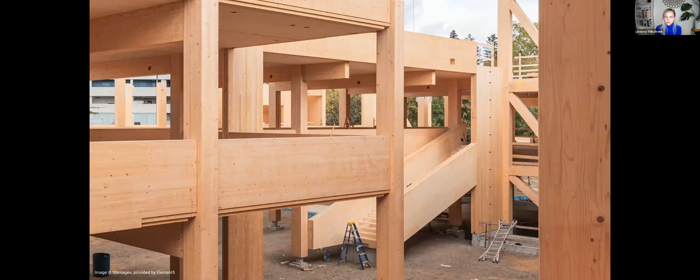Why mass timber as a starting point? Wood construction is ancient, but also evolving more rapidly than ever before. It's more carbon sequestering than any other structural material in existence. Mass timber presents a new way to build renewable, plant-based, urban density that is so essential to low carbon living.

If mass timber is the future, we have some questions. How is the supply chain being built? Who will have access to healthy building materials like this? Who owns the forests that will provide the raw materials? Are there enough trees in the world to build the mass timber cities of the future? Is mass timber safe? Will mass timber improve or reduce deforestation and biodiversity?

Are trees more valuable in the ground or as timber, as carbon sinks or carbon sequestration machines? And will carbon markets anticipate if this value shifts? And finally, how are Indigenous interpretations of forests critical to this transition?

The reason we have so many questions about materials is that we hope there will be a dramatic divergence in the way we view and use resources from the last 500 years. To quote a friend of mine, Jerome Hayford, 'Normal is what got us here.' From the perspective of forests, this is especially profound. The last 500 years of Eurocentric power produced specific imaginaries of nature, value, virtue, and therefore personhood.

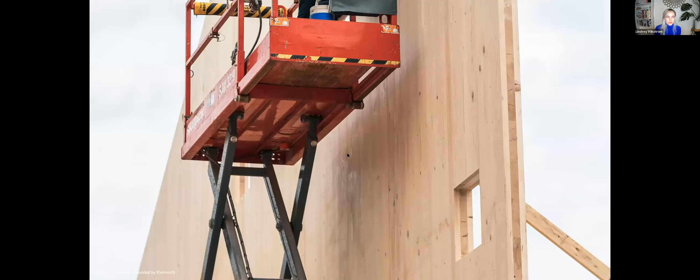Right now, and depending on the region, mass timber is assumed to be about 10% more expensive than typical construction methods, because typical methods are by definition entrenched. And when Black, Indigenous, and communities of color are systematically separated from landscapes and architecture that are healthy and wealth producing, typical methods risk the continuation of exclusivity.

Equity-driven developer Anjali Halova will share with us how her role requires a whole new level of choreography across stakeholders throughout the supply chain. Her dedication to this emerging expertise is what makes accessibility possible.

Mass timber for the last 30 years has been designed to rely on only a few tree species. If future cities are plant-based and certified through the building code using only a few species, does this not incentivize a reduction in biodiversity or, in fact, monocultures?

We are joined today by Dr. Peggy Clouston, who is leading the effort to biodiversify mass timber on the East Coast using trees that are regional. She will share her research on the challenges of certifying organic building components.

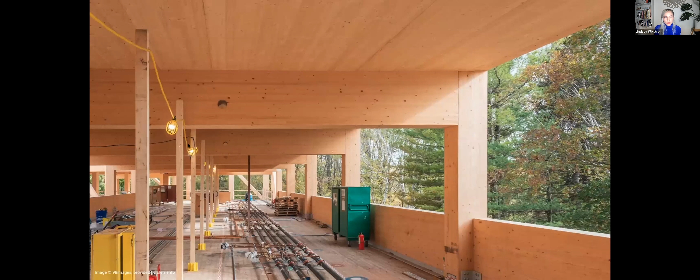Ultimately, planning a forest for the future engages the complexities of public and private ownership and stewardship, as forests span many generations. They require enormous acts of diplomacy and an assessment of bias in new but necessary technology.

Today, we're joined by the President of the Forest Stewardship Council, FSC, Francois Dufresne, who will share more about the rapidly evolving process for ethical sourcing, framing the forest as an essential infrastructure, and how Indigenous interpretations of the forest are being recentered as a means of survival. And with that, I would like to welcome Francois.

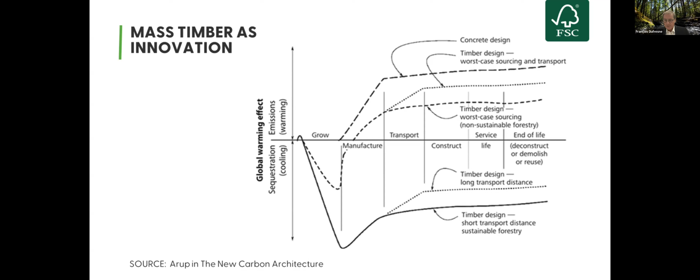Now, let's switch to the human impact. The UN estimates that 68% of the world's population will live in urban centers by 2050, making the pivot toward responsibly sourced mass timber in construction critical. Critical to our fight against climate change and to support the housing needs of a growing global population and the trend of urbanization.

But some may ask, how is wood or mass timber a better option in construction when the degradation of our world's forests is a key contributor to the climate crisis, as Lindsay mentioned at the beginning of this talk? It is true, forests are a natural climate solution. They absorb one-third of the global CO2 emissions every year.

Forests are also home to over 80% of the terrestrial biodiversity, support soil and water quality, and provide us with the air we breathe. But when managed responsibly, forests are also, in my belief, the most amazing renewable resource on our planet.

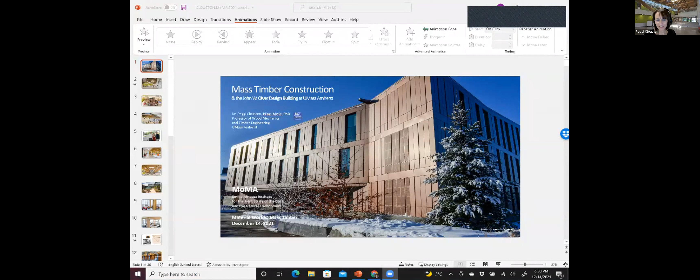Hi, everybody. Just pulling my screen up. Should all be able to see it now.

Well, first, I'd like to thank the Ambasz Institute and Lindsay for inviting me to talk this evening. I'm truly delighted to talk with you about construction with mass timber. I'll do that by way of example with this state-of-the-art mass timber structure, the John Olver Design Building at the University of Massachusetts Amherst. I'm one of the fortunate ones who has an office and lab in this building. I'm very proud to say I was one of the driving forces behind making this timber frame structure.

So I'd like to tell you about how this building came to be and then explain why mass timber was used here. But as Lindsay mentioned, I'd also like to show you some of the groundbreaking research my group is doing on using New England species to make mass timber. So let me start by telling you a bit about the building itself.

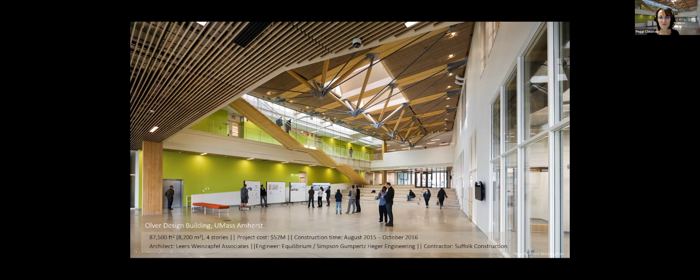It's one of the first buildings of its size in the US to be framed with mass timber. It was completed in late 2016 when there were only about 30 mass timber buildings here. Now there are over 1,000, either built or in the planning stages. This particular building has won 17 architecture and engineering awards, some extremely prestigious, like Building of the Year Award by World Architects. It's really known worldwide—I give tours to people from places like Japan, Australia, and Finland.

My program is building and construction technology. It's housed here together with the departments of architecture and landscape architecture and regional planning. This is my lab here off to the right. Our research and courses all focus on how to build more sustainably, and using wood in the construction of the building was a major part of that.

But it almost wasn't wood. Interesting story. Myself and a colleague, Alex Schreyer—he's over here in the photo, showing students some of the staircase details—we were both strong advocates for mass timber from the start. We tried our best, from a bottom-up approach, to convince the design team to use wood, but it didn't work. There were understandably concerns about cost overruns with timber being a new, unfamiliar technology to the team. It wasn't until I brought in the political heft and willpower of former Congressman John Olver that we were able to secure a $3 million contingency fund for it. It became a demonstration building, and that was really the turning point that made it wood.

Our vision for the building was that as a demonstration structure, it would spur others like it and help us make three points: first, that mass timber is feasible for this size of building; second, that it's more environmentally friendly than steel and concrete; and third—this one's important—that a wood building of this stature could help reinvigorate our own local forest industry. The thought of having a market for local trees, and one day using our own tree species to build such a building, that was the vision.

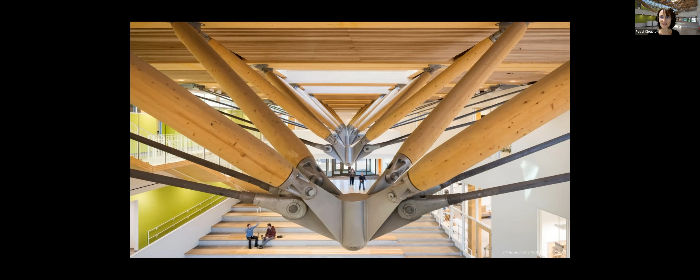These are students getting up close and personal with the main attraction, the zipper truss. This is the student's view into the atrium—we like to call this the Kodak photo spot in the building if you're ever visiting. On top of this beautiful truss is a rooftop garden with indigenous trees and plants. This garden was part of the landscape architecture wish list, to demonstrate intensive and extensive green roofs. Just a fun fact: the garden was actually voted the #1 dating spot on campus.

And here are some students hanging out in the Post and Beam Cafe. Clever name—I wish I could take credit for it, but the students came up with that. As you can see, the columns are exposed, so the structure itself is the finishing material.

And that's one of the great things about mass timber: it can be exposed like this without fire protective coating. In traditional steel and concrete buildings, or even light wood frame construction, the structure is hidden behind gypsum or fireproofing. These big wood beams, panels, and columns easily meet the 2-hour fire rating per the building code, because large sections of wood are inherently fire resistant.

They don't catch fire easily. If you think of a campfire, for example, we start with kindling, small pieces, and the large pieces we put on are the last to catch. When they finally do catch, they burn slowly at a predictable rate. They char on the outside, and that char forms an insulating layer that protects the structural integrity of the inner core of the beam.

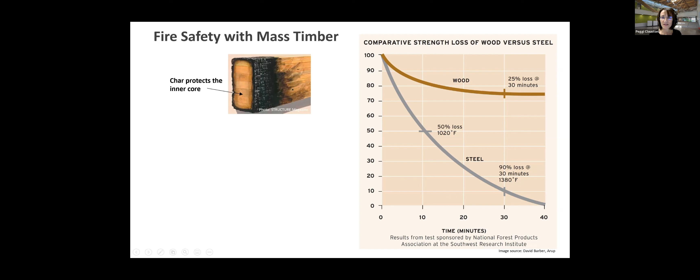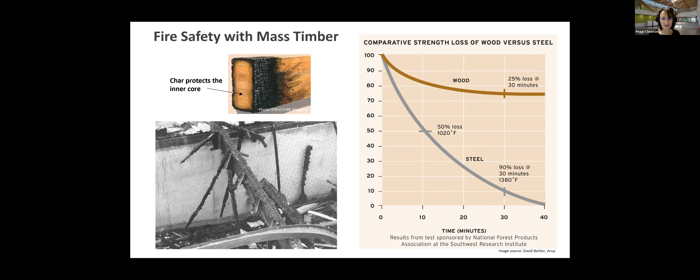Another interesting, somewhat surprising point to many is that wood is frequently preferred in buildings with high humidity, like swimming pool enclosures. Getting to the question of wood's durability, wood rot only happens if it's triggered, under specific conditions: when the wood is exposed to high moisture for a prolonged time with moderate temperatures, and the wood hasn't been treated with preservative chemicals. The moisture content has to be over 19% for those wood techies out there. When wood is used indoors and designed properly, it will last as long as any other building material.

So why use mass timber in particular for the design building? It had to do with sustainable design. That's top of the list. Studies have shown that mass timber buildings are carbon sinks, putting it simply. When the amount of carbon sequestered by the forest during photosynthesis, then stored in the wood, is compared to the amount emitted during manufacture, including transportation and installation into the structure, more carbon is stored in the wood than is emitted. I like to think of these big buildings as carbon storage tanks in a way to offset climate change.

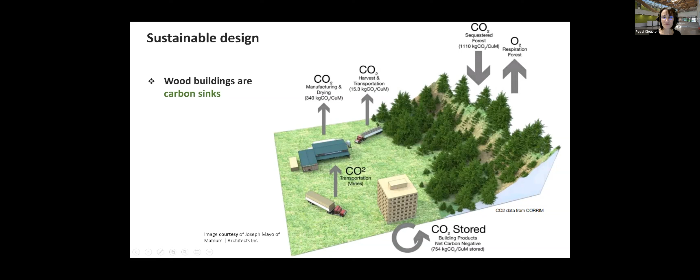But it's also about reducing pollution. Life cycle assessment studies, many of them in recent years, have shown that in every category of cost to the environment, like global warming potential, acidification, and so on, wood products have a smaller environmental footprint than steel and concrete, shown here in orange. In some cases, like ozone depletion and eutrophication, it's 5 to 6 times less. It's truly a substantial difference from steel and concrete to wood.

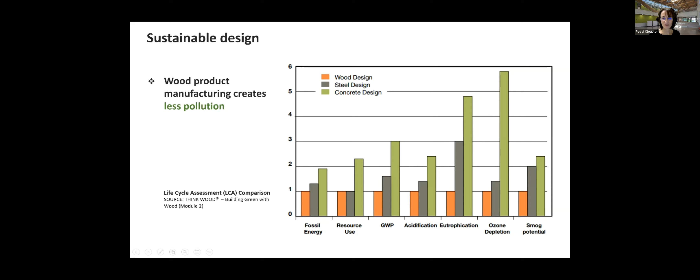Specifically for the design building, an environmental building declaration was done, comparing a steel frame to a mass timber frame. You can read about it in the online pamphlet, there's the link down here. That pamphlet also has a carbon summary showing the total potential carbon benefit of using wood in the building, equivalent to taking just over 500 cars off the road for a year. It's not a huge number, but at least it's going in the right direction, not putting more cars on the road.

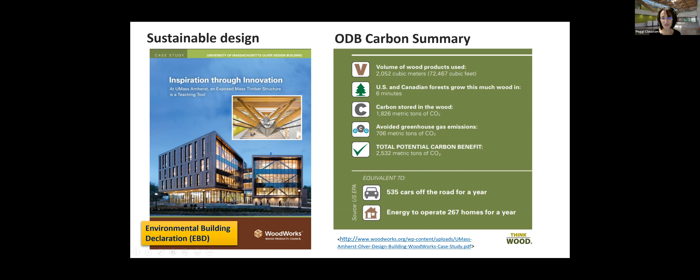Building with wood is also about keeping forests healthy, as Francois was mentioning earlier. Market incentives pay for critical silvicultural practices like thinning and replanting. In the face of climate change especially, we need these activities to reduce risk of forest fire, tree infestation by pests, and land conversion. Urban sprawl, for example, is a major issue, and development is the largest threat to forests here in New England. A recent Harvard study showed that we're losing 67 acres per day to development. So keep forests as forests - this is the mantra, similar to what Francois was saying.

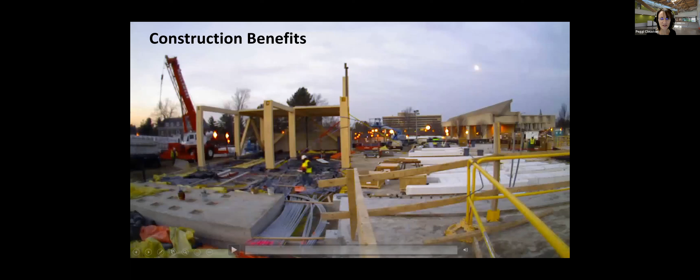And the prefab aspect of mass timber makes construction incredibly fast. This is a time-lapse video of almost the entire south wing of the first floor being constructed in one day. The columns are lifted into place, the beams rest in pockets there, and the floor plates rest right on top of those beams, and so on.

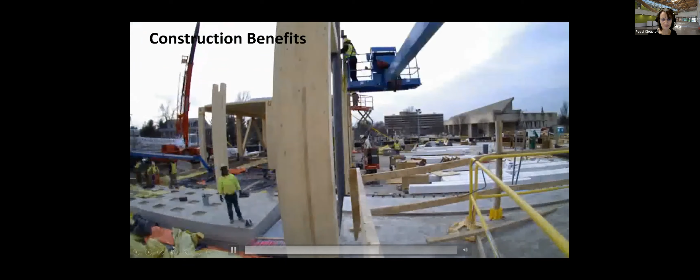It's also very high-tech. These large beams and columns are cut using computer numerically controlled, or CNC, machinery, to get extreme precision so that pieces fit together quickly and easily. There's really no way of being able to align all of the holes between the wood and the steel without CNC machinery. Construction workers say it's like putting together a large Lego set.

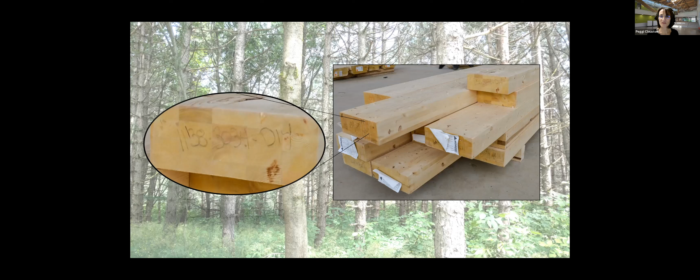Many of our trees here in southern New England especially are small diameter. Small diameter is not good for dimensional lumber, like 2x12s, but they can be used in wood composites. If you look closely at the columns in the design building, you'll see that the full column is made of 1x2 sticks of black spruce from northern Quebec.

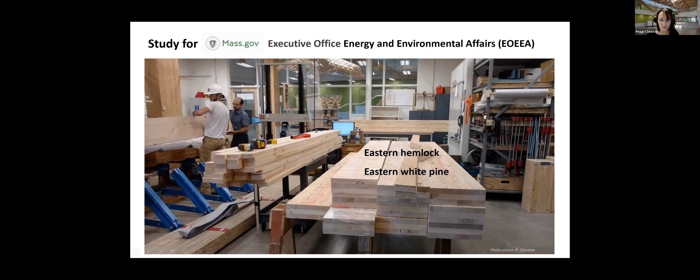And as Francois mentioned, extremely tight grained, very dense, good quality wood for building. This kind of information bodes really well for some of our own local tree species. So to this end, in 2018, my research group was funded by the Massachusetts government, the Executive Office of Energy and Environmental Affairs. We worked on establishing the structural feasibility of using eastern hemlock and eastern white pine specifically, separately as lamstock and cross-laminated timber, CLT for short. The lumber came from Western Massachusetts and Southern Vermont.

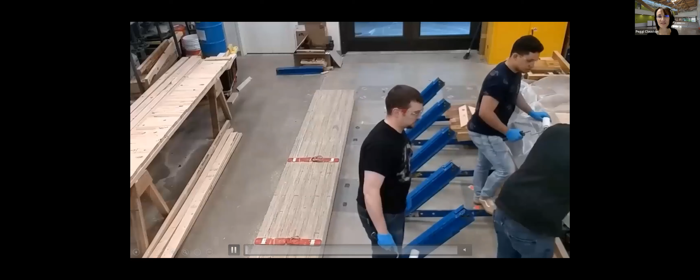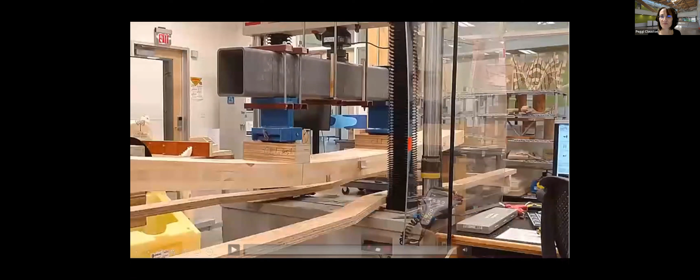And then we strength test them to make sure they meet engineering standards. This is another video. Keep your eyes on this spot here. We put them into a testing machine and load them up until they break to measure their engineering properties. And then we publish, because that's what we do at the university.

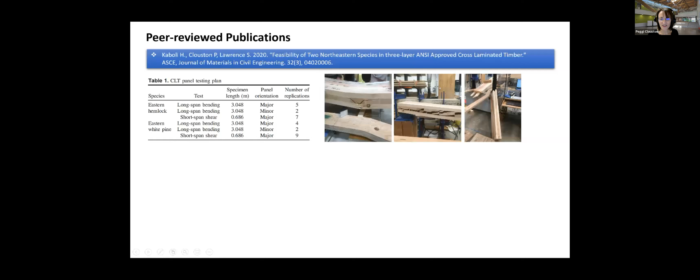The results are summarized in this journal paper that came out last year. We tested some 30 panels in total, and here's the carnage over here. We found that comparing the results to the 7 established grades for cross-laminated timber, these are made from species like spruce, pine, and fir - hemlock works quite well, but pine not so well.

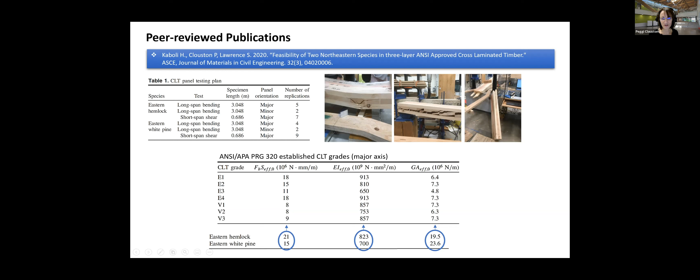These are the 3 most important engineering properties. In particular, the one in the middle for pine at 700 is just slightly higher than the smallest of all the others. So it can still be used, but it might not span as far or carry as heavy loads. So we're currently working on

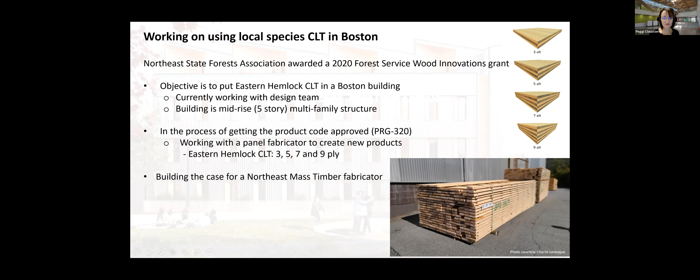putting Eastern hemlock into an actual building. Northeast State Forests Association was awarded a Wood Innovations Grant, specifically to put Eastern hemlock in a 5-story multifamily structure. We're getting closer towards that goal. We're in the process of getting the product code approved - and by product, I mean 3-layer all the way up to 9-layer panels. By doing so, once we get it into the building, we'll have a case for a Northeast mass timber fabricator.

So that concludes my presentation, and I'll hand it back to Lindsay to continue.

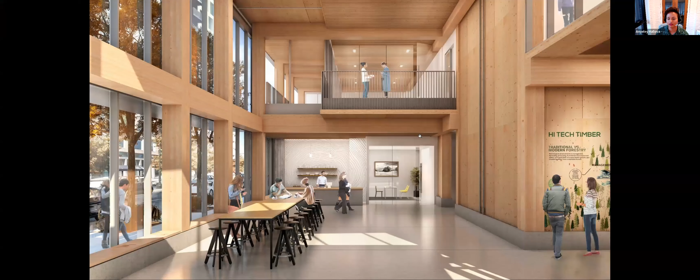One of the unique aspects of this project, really on the human side, was it was a pairing of environmentalists, who came more with an urban perspective, with logging, forestry, and manufacturing industry, coming in with a rural perspective. So a lot of people might ask how does such an innovative project come to be? I can't underestimate the importance of a team in this type of project.

First of all, we had an impact investor, a client who really cared about advancing this new technology, about carbon sequestration benefits. This was intended to be a resilient building, which Chandra will talk about from Lever after me. And really our client cared about rural manufacturing jobs. So we had that. And then from the development side, a developer, which was me as a partner of my former company, Project, assembling a team of like-minded companies, the whole architecture and engineering team who were passionate about the environment and building innovation.

Prior to the International Building Code changes, Framework needed a jurisdiction that would work with us to create a pathway and criteria for approval. And we were able to find that in the state of Oregon.

So while the R&D project was a huge success, unfortunately the real estate part of the project went on pause due to changes in the economy at that time. Given that, some of the innovations that were steeped in this idea of triple bottom line—environment, economy, and the social aspects—were not fully realized. Some of those social outcomes were the affordable housing, spaces for B corporations, and the idea that the building would be built with a high percentage of minority, women, and emerging small businesses.

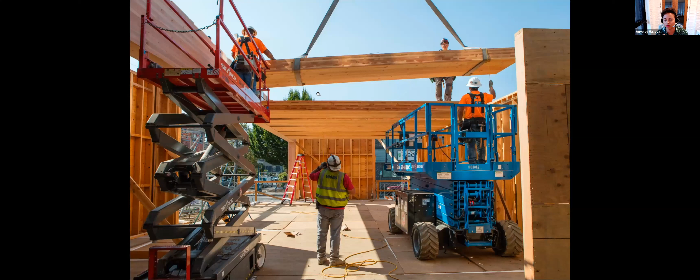That kind of connection was helped and facilitated through a nonprofit called Sustainable Northwest, really thinking about how do we source these materials in a sustainable manner, thinking about the supply chain and where that material is coming from.

This is an example showing the CLT being put into place into what is now the Vernier Community Room, which is a big part of the Nature Conservancy's new program that they could do in this building, which they couldn't do in their prior, unrenovated building. It was really about bringing together environmental and conservation organizations to tackle these regional challenges within the context of that region.

So the next project that some of our team members, I would say from Framework, went on to Nature Conservancy and then on to Meyer Memorial Trust. Meyer Memorial Trust is one of Oregon's largest foundations, and their giving and how they give to projects and programs really prioritizes equity in the workforce with a high commitment to sustainability.

What was great about this project was really a focus on creating a replicable model for commercial development. A lot of times people think of foundation work as, they can just throw as much money toward it and create kind of a jewel. There are really important parts about being a demonstration project, but they wanted it to be a demonstration project while also being able to be replicable at market rate.

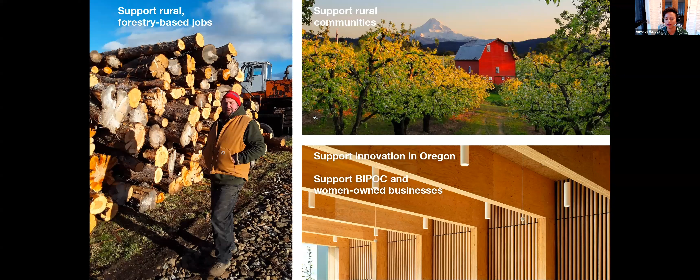In this woodwork, Meyer had specific goals dealing with supporting rural forestry based jobs, supporting rural communities, and also supporting innovation in Oregon, all within the context of increasing BIPOC—Black, Indigenous, people of color—and women-owned businesses in the work that they did.

So they decided, in partnership with Sustainable Northwest, who I mentioned before was working on the Nature Conservancy project, to come up with their own definition of sustainable wood. One of the reasons they did that was in thinking about equity.

The criteria they used: first, they wanted to source wood products from rural, tribal, or minority women and emerging small businesses. Second, prioritizing FSC certified wood. And third, prioritizing wood products from the region. They did that through a system that was sort of like green, yellow, red, asking how does it meet this criteria with regard to sustainability?

This was a lot of work—almost like its own project you could pull out of the rest of the project. The question is, why did we do all that work? On one hand, we could have said, let's make this 100% FSC certified, and we would have done that and called it a day and said we're meeting our sustainable wood criteria.

What Meyer actually wanted to do was two things. One, they wanted to get more BIPOC businesses involved in the manufacturing and supply of the products, and exposure to the mass timber industry. And two, we wanted to have as little of a premium cost-wise as we possibly could, because there's a lot of pushback on market rate development that says if you specify certification at any level, you're increasing premiums.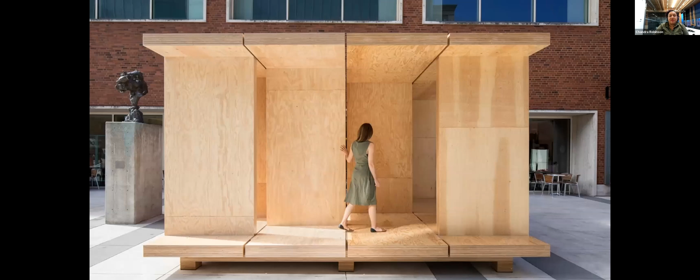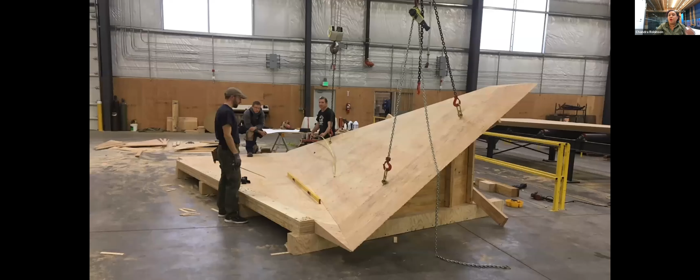And so over the last 11 years, we've grown a lot, not just in our design work, but also in the research and innovation that goes into that work and that inspires it. One example is our early work using mass plywood, a product that's only made here in Oregon. This is a pavilion we created as part of the exhibition we designed for John Yeon at the Portland Art Museum. Really, using this material was a way to explore what it can do, what it looks like, what it feels like, what kinds of shapes it makes.

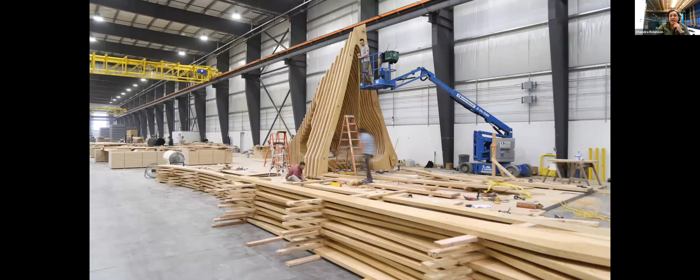And so we went on from that pavilion to still work with that same manufacturer and use their product to create a few more pavilions that were then shown at the mass timber conferences held here in Portland. And really, again, it's exploration of all of these materials. What are the things it can do? It can be sharp, it can be soft, and we're really thinking about what quality of space is created from this.

So why do we want to do that? For us, this is a local product. Both the wood and the products created from it are sourced right here in our region. It creates really beautiful spaces that feel good to be in.

Peggy talked about biophilia, and when you think about biomorphic forms and patterns, you're seeing it right here. Material connection to nature, again, you're seeing it right here. It really allows people to take focus off what they're doing in a space, maybe look at the materials, maybe look outside, and it really does bring calm and create less stress and anxiety than other types of spaces can.

Thinking about these products creating this beautiful space, like mass timber, and I know in the chat it came up, what exactly is mass timber? It's an engineered wood product made of much smaller pieces. This is mass plywood, so a lot of lamellas are in here, which also means there's a lot of adhesive. People have been worried about that, but manufacturers are working towards more sustainable mixes with low VOCs, and some of the local mass timber manufacturers we work with are already using GREENGUARD certified products and adhesives.

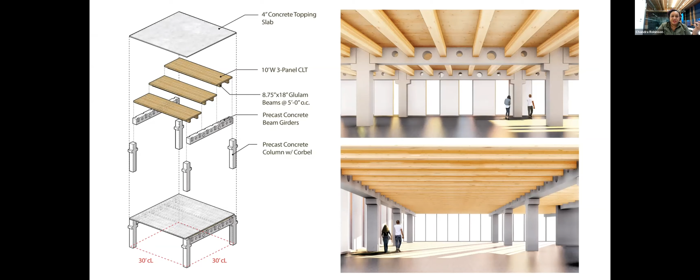This project is actually the creation of a whole new mass timber product through our design. It's a CLT double T. There are concrete double Ts out there, but this is a CLT double T that's created, and it doesn't have any steel connections. It just sits right into those corbels.

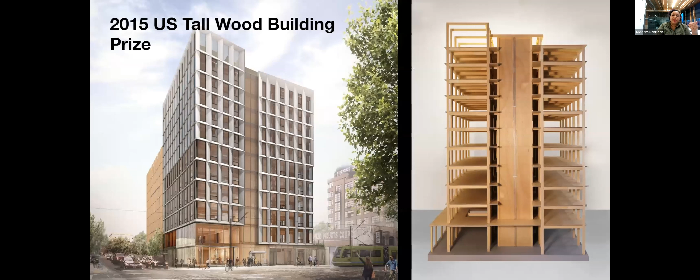For this project framework, it's really about a deeper engagement with the material landscape. We care about the whole cycle, who manages these forests, who's harvesting them, who's milling it, who's manufacturing it, all the way down to our engagement with it physically on the job site.

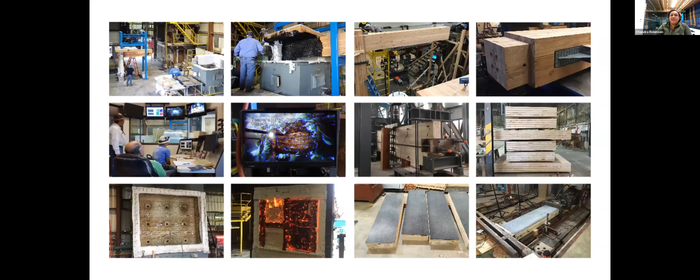Through that project, we did almost $1 million worth of testing: acoustic testing, structural testing, fire testing. The project was designed and fully permitted through the state, and it didn't go forward like Anjali said, but all of that work done in this testing really helped lead to the new mass timber construction types being added to the 2021 IBC. It was an early adoption in Oregon, so we were allowed to use that type for construction a year before.

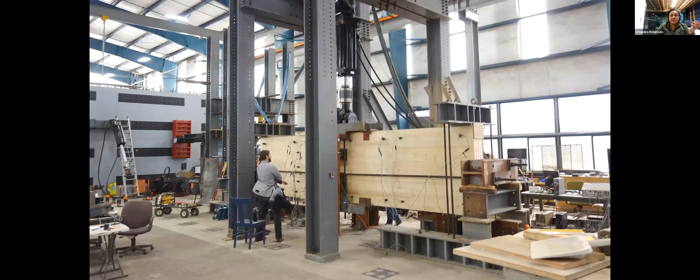So current tall wood buildings are using the details that were designed through this, because these are the details that were tested. This is structural testing with our engineer, using this technology, this resilient wood rocking wall so that your cores are also wood. This is a shake table test of just a 2-story, but we've been working on a 10-story that I think is going to be up and running and ready to test sometime next spring, maybe in 6 months or so.

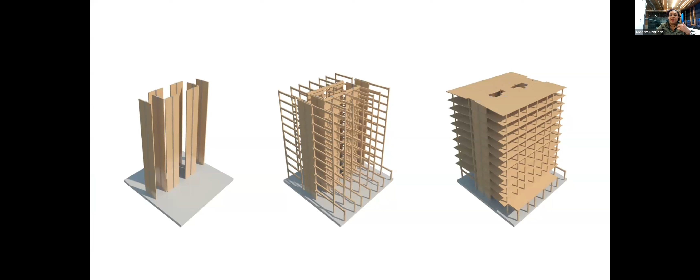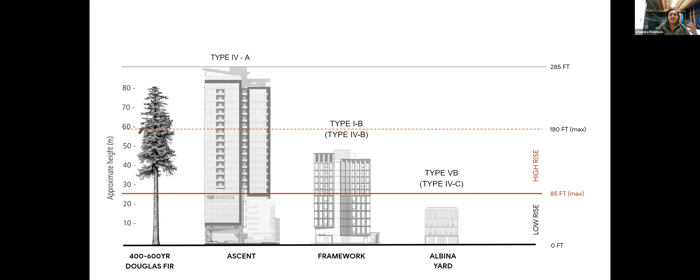That was really the intent of the project, open source, to give people a place to start to really make these move along. So now I'm going to share a couple of projects and then tell you what we're working on now in terms of research.

So Albina Yard, that's our office, that's where I am right now. Albina Yard is the first building in the country made with domestically produced CLT. It was produced here in Oregon, and the wood was harvested here in Oregon, like 3 hours south of Mount Hood that you see in the distance. This image is so cool because all of that material really came from those forests way out in the distance, and they're right here on Albina.

This is our building: timber structure, timber curtain wall, really beautiful interior, really warm and light, and a great place to work. Once we started construction and realized how gorgeous the space was going to be, we decided we had to move in. So here we are many years later.

And this is the CLT stair, that's also really beautiful. We've used this in Meyer as well, but using mass plywood and a bit different structure system. With Meyer Memorial Trust, as Anjali said, it was a big focus on sustainability and equity.

We really feel that equity and sustainability are linked, because the folks who are most impacted by climate change are often people of color and people who are poorer. So when you think about sustainability, I also think about protecting the habitats and the neighborhoods of people who are not my neighbors. They live many hours away, but I still care about the environment that they're in.

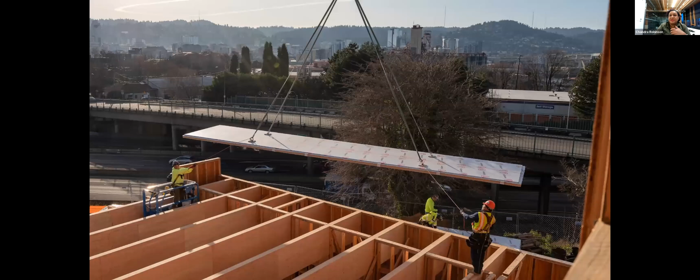This is looking into the Meyer building. This is the mass plywood. Here is a roof panel flying in. We had a temporary roof put on it because it gets very rainy here sometimes, and we wanted a little bit of coverage of all the structure you see in here. But this really is the final product.

This is the event space, called the Center for Great Purposes. It really shows you that you can use something that's industrial and seems rough, but do a little work on it and have it be really refined and humble, really showcasing the innovation happening around you.

This diagram shows you where different wood products are in the building and where they were sourced from. All of these we're showing are FSC certified, not everything in the project was. If you look at the tall 3-story portion of the building, that's all traditional stick framed, and the shorter part is actually mass timber construction. That again was part of the equity story—bringing in new partners who didn't have experience in mass timber and maybe wouldn't have been successful bidding on the project because of that. By creating this hybrid structure, it allowed more people to be available to participate.

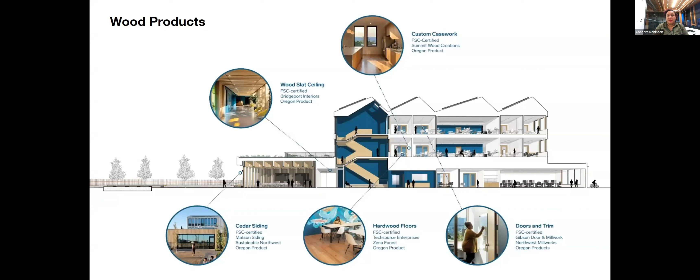So this is sort of the regional impact—all of these products coming from really close to the site again reduces carbon.

The last thing I want to talk about relates back to the framework project, forest to frame, and also to Meyer. As Anjali described, on Meyer there was a sustainable wood sourcing criteria, a definition for sustainable wood very specific to Meyer Memorial Trust and their goals, mission, and values. What we're doing with this new wood innovation grant we just won this year, and we're very excited about, is to actually create a tool to help people in the design and construction industry understand the sourcing a little better and understand the forest practices. Not everyone will have to repeat all the research we've done on these past projects, but we can create a tool that's, again, open source for everyone to use.

There are some really interesting new models of forest management and harvesting happening. I visited some forests up in Washington State where the land is owned by the U.S. Forest Service, but the harvesting of the wood is done by a private company, to the specifications the Forest Service has set up — the kind of thinning, saving trees of a specific diameter, how much litter they can leave on the ground. All of those things contribute to the health of the forests and reducing catastrophic fires. It's this public and private partnership that creates really great outcomes.